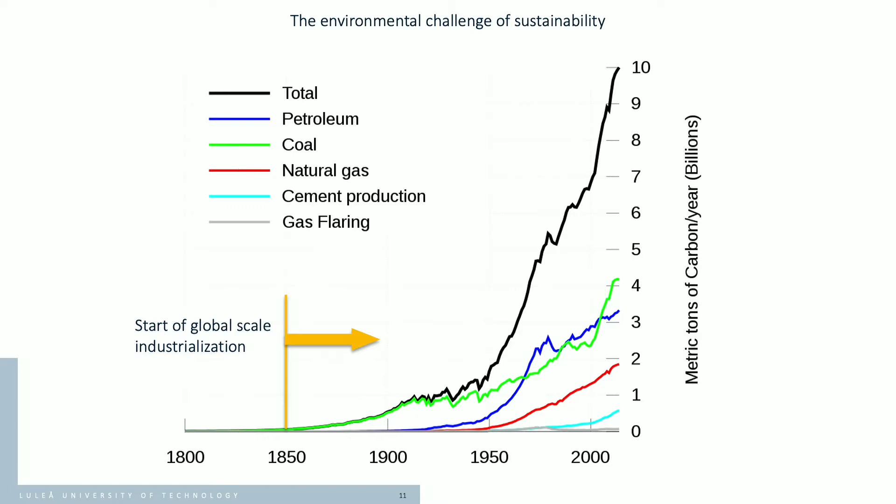What you can see on the vertical axis is the contribution of oil or petrol, coal, natural gas, cement production, and gas flaring in the atmosphere we have. That is something that is measured when it comes to CO2. But there are also other emissions that we are talking about, the methane emissions - so everything that is related to carbon.

So there is a lot of debate, of course. People say global warming is an effect of the industrialization, but it can be also just a cycle of the Earth. But nevertheless, it is an effect, and there is something that happens there. It can be both, it can be one, it can be the interaction, one more than the other.

So I would like you to think a bit about and reflect upon your individual carbon footprint, and mine. I have done that. So I would like you to do an exercise with me.

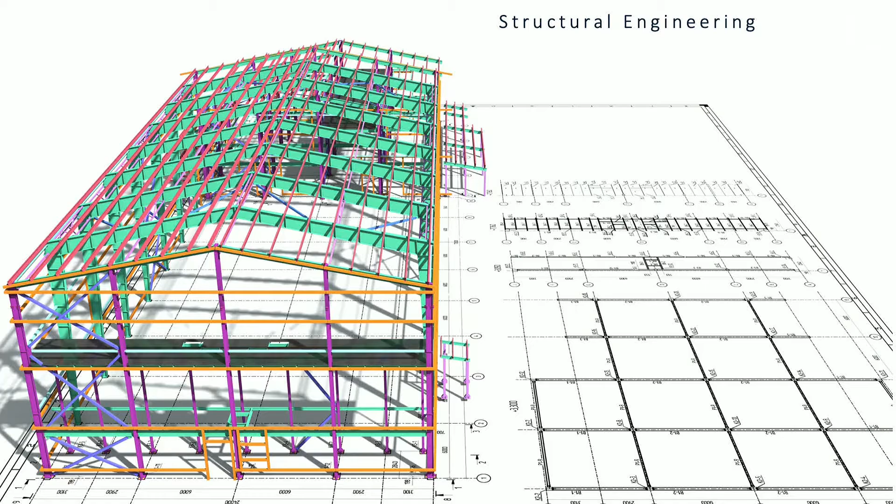And we, as structural engineers, are applying normally mathematics and physics to solve some problems that are, let's say, of abstract nature in many ways, I would say. We are making some simplifications, we are putting them on paper, we are creating some diagrams, and then we are understanding how the forces are flowing through a structure.

So for that reason, structural engineering is an applied science, and it is also an applied research area. We need to collaborate with other disciplines in order to make use of our results for them, or us using results from material science, for example.

So let's put it like this also. The aim of structural engineering at the end is to facilitate the structural design or analysis so that structures are safe, serviceable - we mean by being able to use them - and durable. We cannot build a house like this and then have to replace it in 10 years, right? That's not durable - now we can call it not sustainable also. And structural engineering is part of a bigger process during the life cycle of structures.

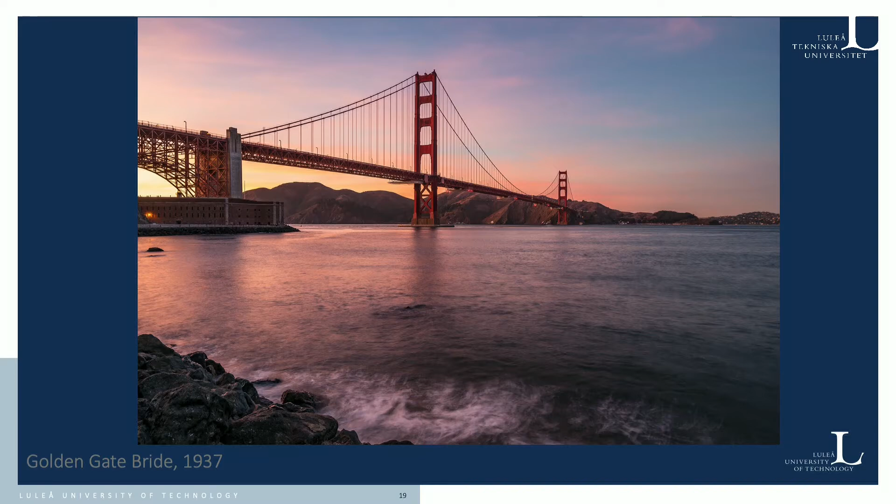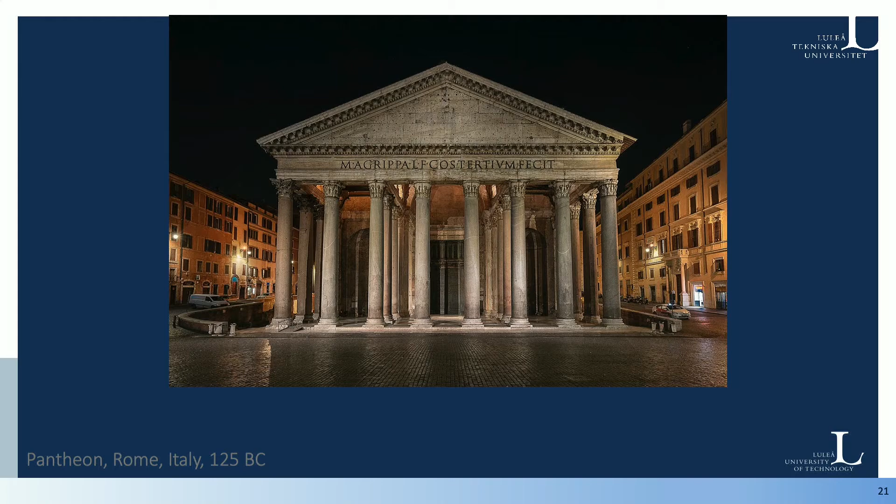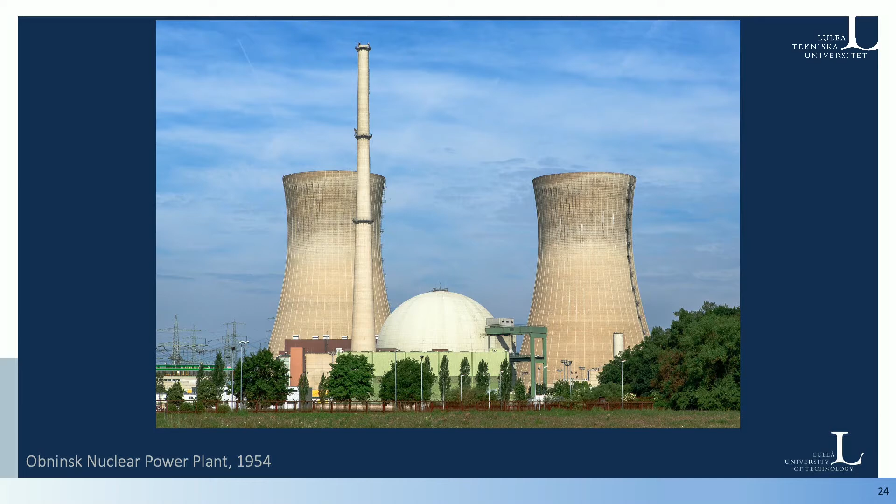So I would like to ask you, why do we look at all these structures? Why do I choose these structures? Is there a specific reason? And I say yes, because in all these structures there is a value of some sort.

Value for structures can be defined in monetary value. You have an apartment building from the Miljonprogrammet, its price has likely increased. You have Burj Khalifa, which has a lot of value, not only monetary, but also cultural value for Dubai. The Pantheon, the same, it has cultural and social value. So most of the built environment, most of the buildings we are using today, have specific value.

The Golden Gate Bridge has a use value, that's its main purpose, you have to cross over it, but it also became a cultural value. Everybody knows about it. I talk about the Golden Gate Bridge because I heard about it, and it's very beautiful, and I looked at it.

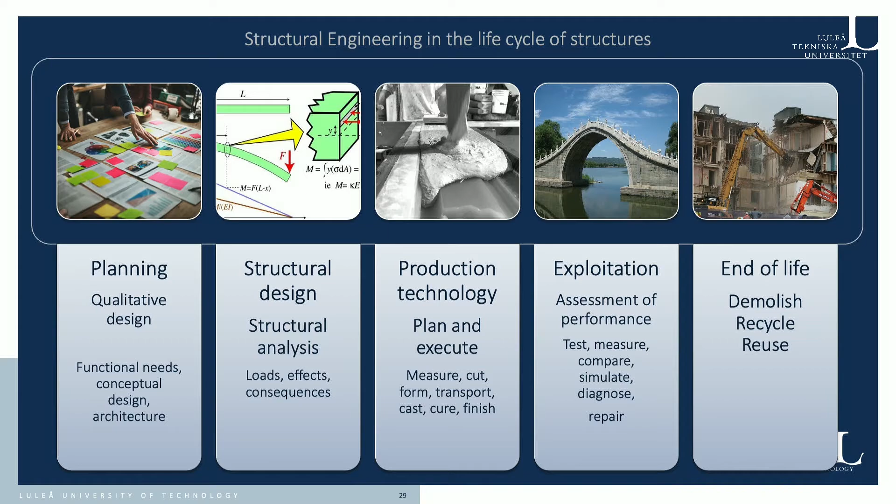I would like us to go back to this picture and look at it in a linear way as it is. We are doing planning when we talk about a new structure, usually the client has some wishes. Then we do some structural design, then we produce the structures. Once they are there, we start using them, exploiting them. And then suddenly we have to take them away, replace them, and so on. This is a linear model, cradle to grave, as mentioned before.

And the question here is, in all these processes that we have, what is the impact we are having on sustainability? We have 4 legs: product, construction process, use, and end of life.

In each one of them we have different subcategories, cataloged in an ISO standard. I'm using the same terminology here for simplicity. But it's important to look at it: when you have a product from raw material, you need to excavate it, transport it, and manufacture something from that raw material. Then you transport that product to the site, and do some construction, and so on. Then you use the building, and at the end you have to dispose of it.

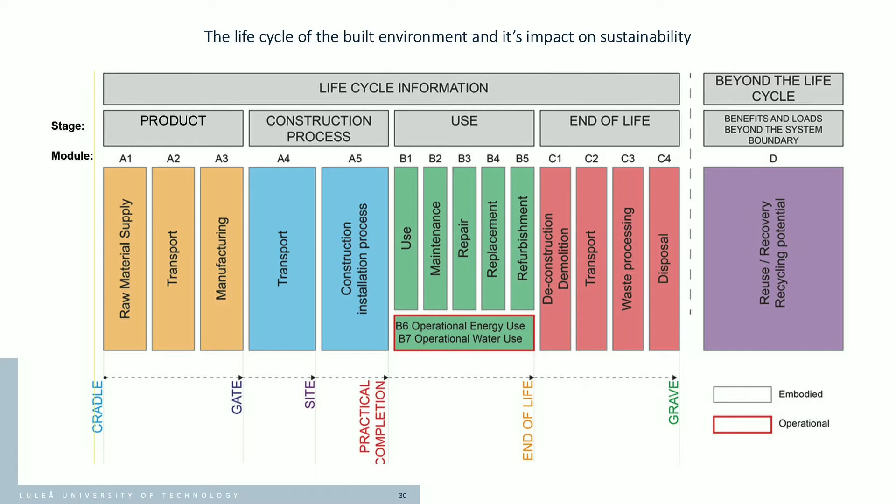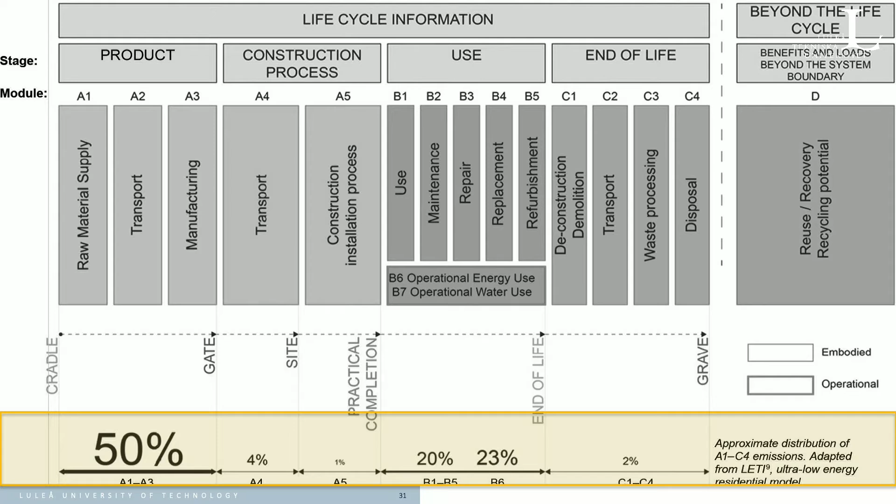5% goes to the construction process. This is how much we are using. And then we have 20% in use, the B1 to B5. But then, surprise, we have also something else there, a 23% for the energy that we are using to keep operating those buildings. Like here, we are not freezing because there is some energy that we are putting in here to warm up, right?

And then end of life, it's only 2% that we are consuming. So just to sum up that part, that is how much we are influencing the full life cycle.

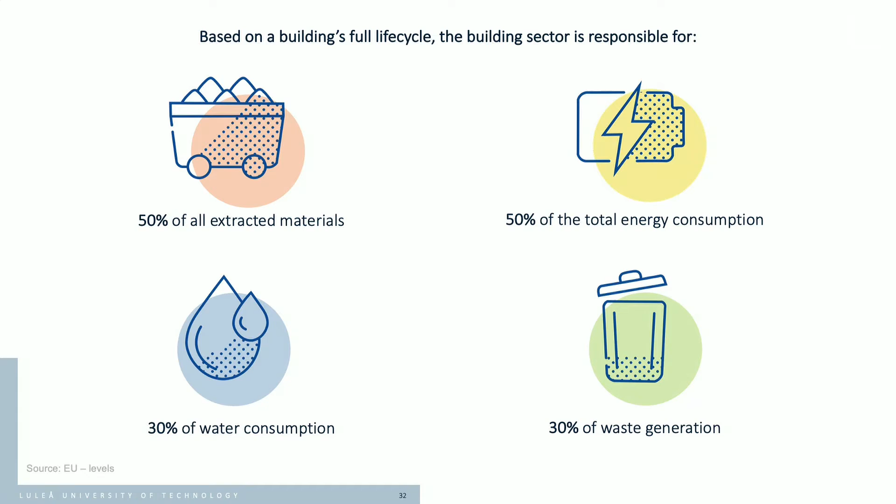50% of all extracted materials go to the buildings. 50% of the total energy consumption goes to the buildings. 30% of the water goes to the buildings. And then we are generating 30% of all the waste in the world. It's a lot.

But then there is a solution also, I think, or something that we would like to provide. And working here at LTU in the Structure and Fire Engineering division, we are considering this. So we took all these categories and looked at it in a way like, how about we can try to create an infinity loop in construction?

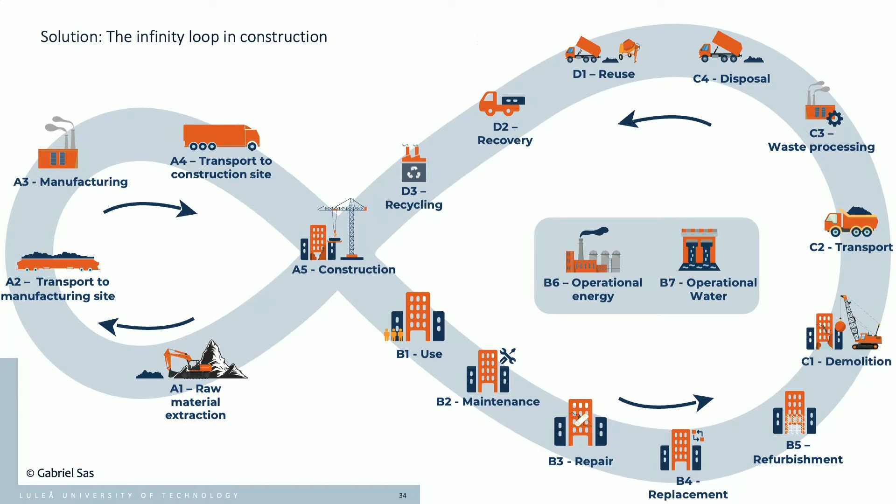So we would start from A1. My pointer doesn't work on the super white screen there. And we go around, and then we try to optimize the processes, and we try to actually get back to raw materials, but maybe skip extracting more, or transporting, or manufacturing, or transporting on the site. And we are just ending up at the construction phase already.

And in that way, we would say 55%. So what this tells us, or me at least, is instead of building something new, let's try to keep what we have now in use. Because we can save up to 55% of the carbon footprint.

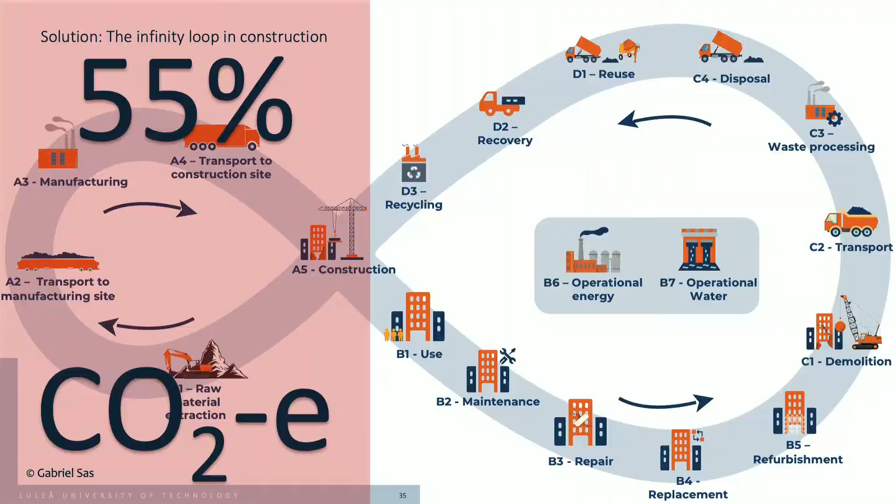Lars, you're not very convinced.

So when we're looking also a bit at the potential of the structural engineers, like the new generations we have here, how do we... I'm considering myself very young, and we have also these generations here that are super young, and I'm so proud that you are here with us today.

It's very important maybe for all of us to acknowledge that. In the building process, and according to some research done by the Order of Architects in UK, they have evaluated how much we can actually reduce the carbon footprint at different stages based on each profession's role.

So if we are working with strategic definition, which usually is the client and maybe a lawyer or somebody working with a manager, then of course you can still do many changes. You're still at 100%. You can change the building completely. You can do something else.

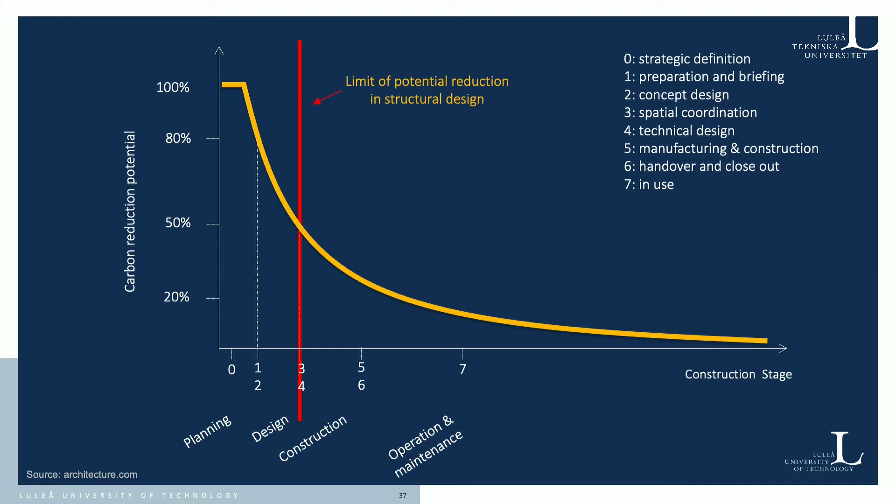When you're looking at preparation of briefings and concept design, you already have decreased by 20%. So you're at 80%. You can still change or influence the carbon footprint. And us structural engineers are at stage 3 and 4. So up to that point, we can reduce the carbon footprint by 50%.

So maybe let's look at some numbers, because I know there's a lot of talk about very beautiful graphs, but let's see what it means in numbers also, right? So if we're getting back again to our exercise of understanding what is sustainability and how much carbon footprint we are producing, I would say like this.

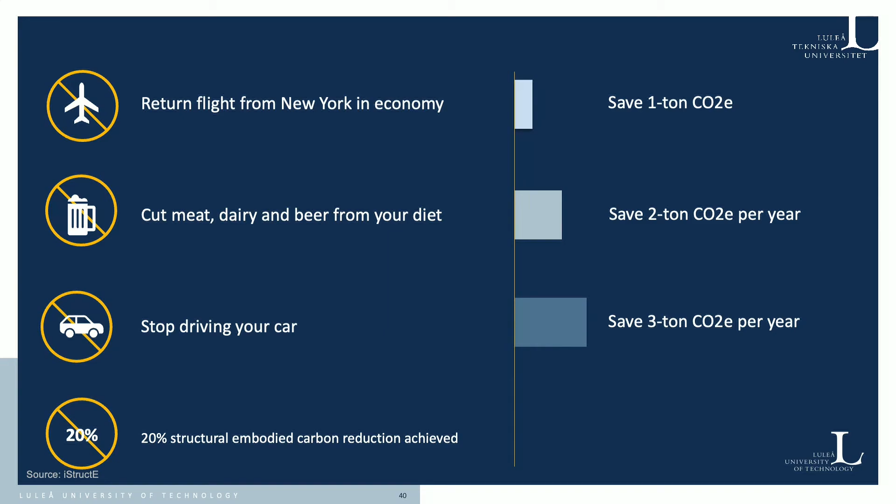If, as a structural engineer, I manage to reduce the embodied carbon by 20% during a year, and the research is done on maybe the average of, let's say, a structural engineer designs about 5,000 square meters, and for activities connected to raw material extraction and construction, we can account for about 200 kilograms per square meter. And then if we reduce it by 20%, that's how much we could save.

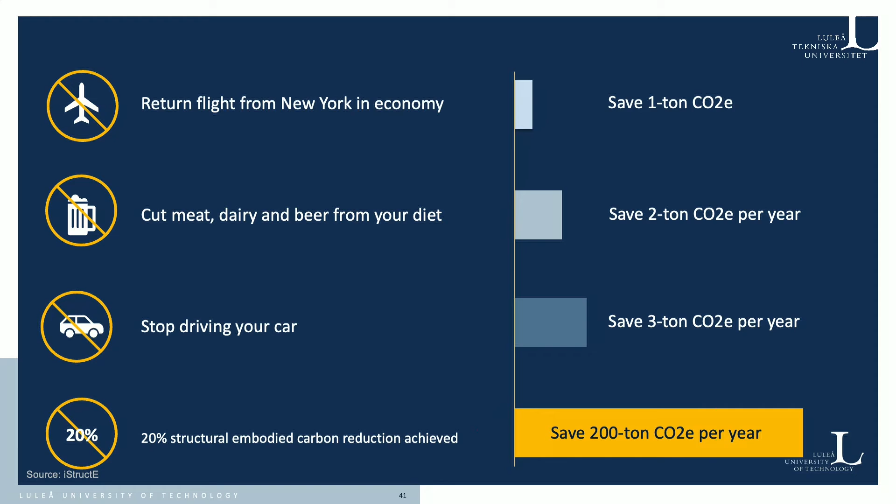It's 200 times more than flying to New York, or 100 times more than not eating beef. So we can continue eating beef and meat and drinking beer and having milk products in our diet.

Another question that popped up in my mind when I was doing research was how can we do this in practice. Another research done by IStructE, the Institute of Structural Engineering, tells us how this can be done. I'll let you read these things, but I specifically like to highlight something called build less, build clever. Those are the most important things from my perspective. These are ways, these are means, that the next generation of structural engineers can use to influence the environment.

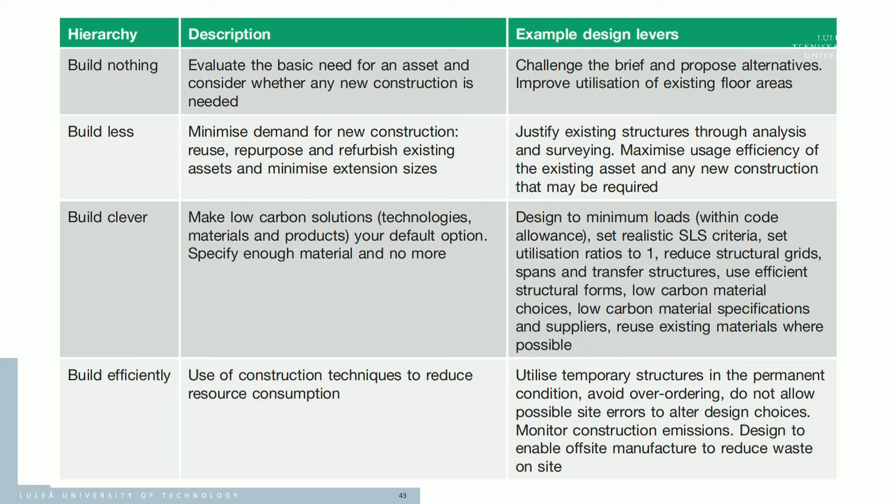I think we are good, right? Most of us got through it. For those of you not that familiar with the subject, maybe the first column is very important, and the rest is more like details of how this can be done. But for our students and for us working in this field, I think all of the levels are important, but there are just some examples there too.

So now narrowing down a bit, our mission at LTU in our division of structural and fire engineering, and mostly for the work we are doing in structural engineering, was a question I asked myself: how can we contribute as a group? What would be the thing our group would work with mostly in the future?

So we had some discussions, some workshops, some ideas, and then we came up with a concept we call true capacity. If we would like to extend the life of structures towards, of course, the aim to have sustainability, then we would like to work in a synergetic way with three main areas.

This requires multidisciplinary work because we can do tests of different nature, from small-scale tests to testing materials, or testing bridges, or testing just beams and so on. But we also have to record the data, which we call structural health monitoring. We need to know what we are doing, measure the data, and then make sense out of it. And then we can also extrapolate the results by doing simulations.

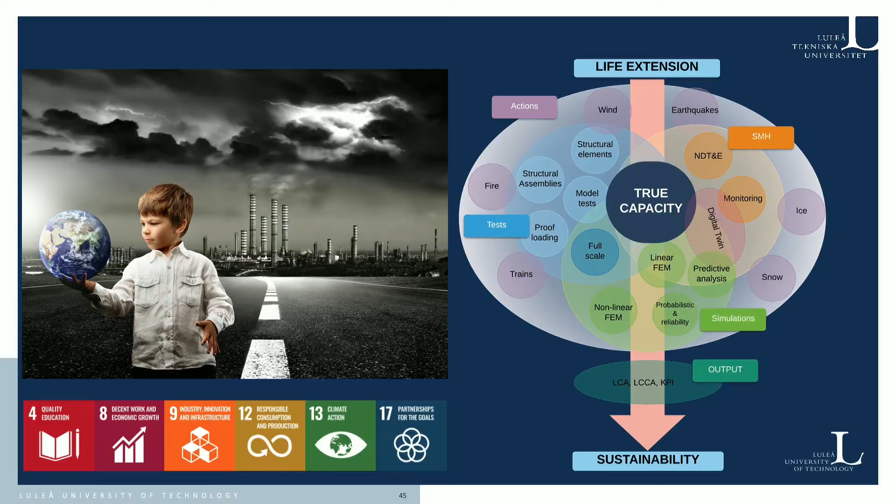We can use the tests we are doing as benchmarking, and then extrapolate towards more generalizing, creating some new concepts. Then, of course, we have to measure what we are doing, so we use the outputs, and there are different methods we can use for that, to quantify if we are achieving some goals towards sustainability. And now we know we want at least a 20% reduction, right? So we can all work with all these areas.

For us, it's important to work towards the sustainable development goals. Education is very important; we have a mission as a university to educate, and this is the primary reason why we are here. Then we need to work towards producing and helping produce decent work and economic growth. We need to work with industry and provide options and solutions for innovation. We need to look at responsible consumption, as mentioned, and participate in all other activities we could be invited to participate in or collaborate with other disciplines.

Activities we are planning to work with, and have started working with maybe for many years, include some we have not yet started but will in the future. These are three we are looking at: life extension of existing buildings and infrastructure, which our research group has been very strong in over the years; better materials and design methods to build for many generations; better prediction of the true capacity of buildings and structures; and finding ways to optimize resources and resource utilization.

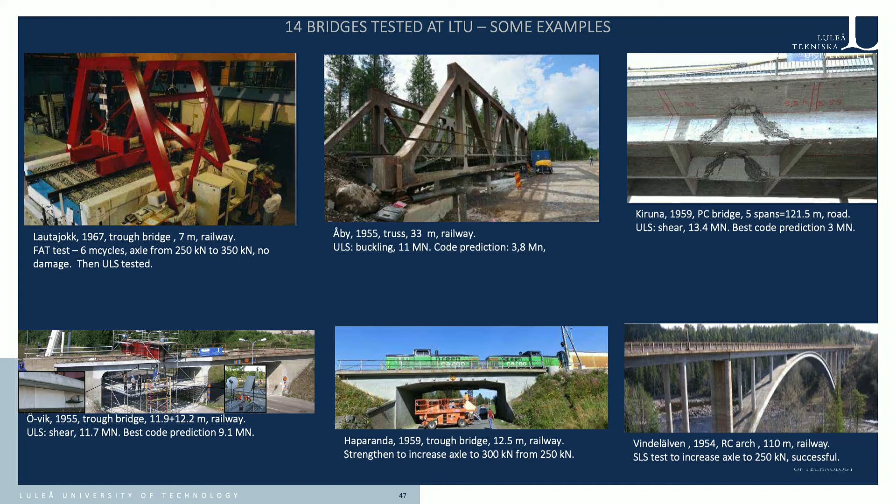The whole idea of this test was to see how much more load we can put on these bridges and still use them, to know how much they could hold if they were in use. The conclusion was always that they can hold more, 14 plus, I would say. There was always extra capacity in them beyond what the test required.

So the question is, why should we demolish them? Why did we demolish some of them? There is no direct answer to that question. I think it's more a matter of understanding and balancing all the aspects related to those specific bridges.

Now we are looking very deeply into the whole bridge population in Sweden. We understood there are about 16,000 bridges in Trafikverket's database, and then there are 4,000 railway bridges. We are estimating there are about 10,000 more owned by others, which could be municipalities or private actors.

One thing we noted is that the bridge stock is getting older, but the problem is that we are building faster than ever. So they are getting older, and we are building faster. That's not a very good combination, because they are still going to get old, and we're going to have more older bridges.

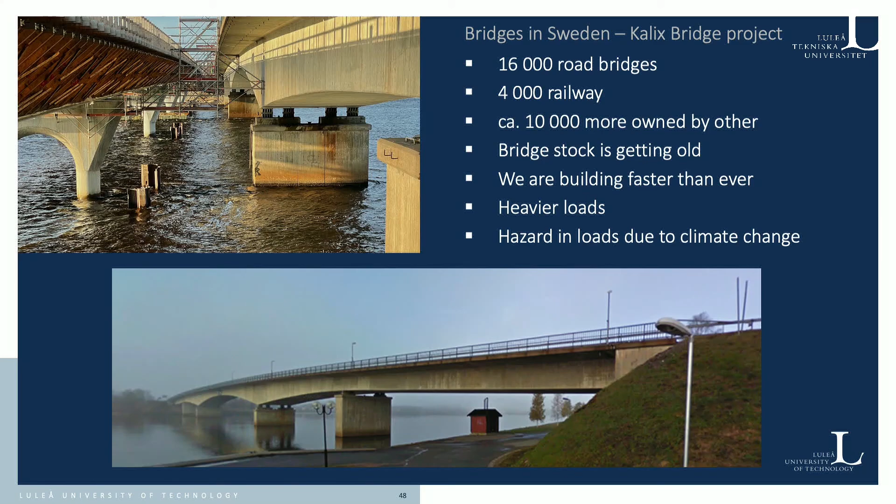I would like to invite you to follow up on our project where we are going to test the bridge in Kalix, the one that is going to be demolished, to understand how. The main aim is to develop methods so we can apply them on other bridges to understand how much capacity they could hold in the future.

So with this part, I'm very close to completing my presentation, and I would just like to make a short summary of this lecture about sustainability, conscious structural engineering, and how this contributes to creating structures for the future without jeopardizing the environment.

Maybe three takeaways for you. If there is something I'd like you to remember from this lecture, it would be this: we need to extend the life of existing structures. If we do that, we can save 55% of the CO2. It's not possible everywhere, and it's never going to be possible to save everything, but try to understand and find the value in the structure you're working with.

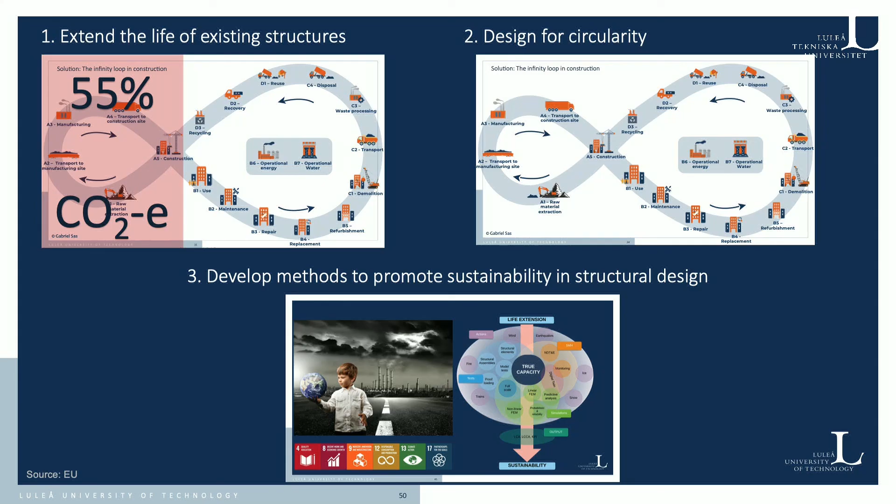Second, design for circularity. Understand which processes are important in the CO2 emission or the carbon footprint we are living on in the world. Third, which is more related to the work we are doing, we want to develop methods to promote sustainability in structural design. This requires collaborative effort. For everything we are doing today, we cannot do it alone. This is too big a challenge for one person or a small group. This is a challenge for the whole humanity.